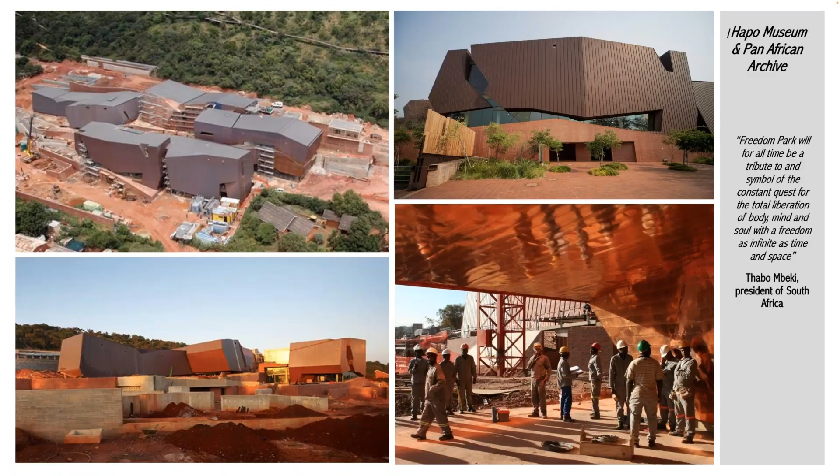During construction, I think also many interventions from governmental side caused delays in the development of the main museum building.

When we presented the design, we had the opportunity to present to the president. When we did our cost estimates, we did not have the full extent of funding, and at that stage the president liked the design and committed to get additional funding. But as things go in government, it took so long to confirm the funding that we had to value engineer, reduce the budget, go out on tender, and appoint a contractor because we could not confirm the additional funding.

Only later on we got confirmation of the funding, but ultimately that delayed the project. So the question is, how do we deal with such delays when they come up?

When I started my research into delay, I really started with the question: what causes delay in construction projects? And the other thing I wondered was, is there any synergy between countries? So I studied delays in 16 or 17 different countries, and there's a list of those countries.

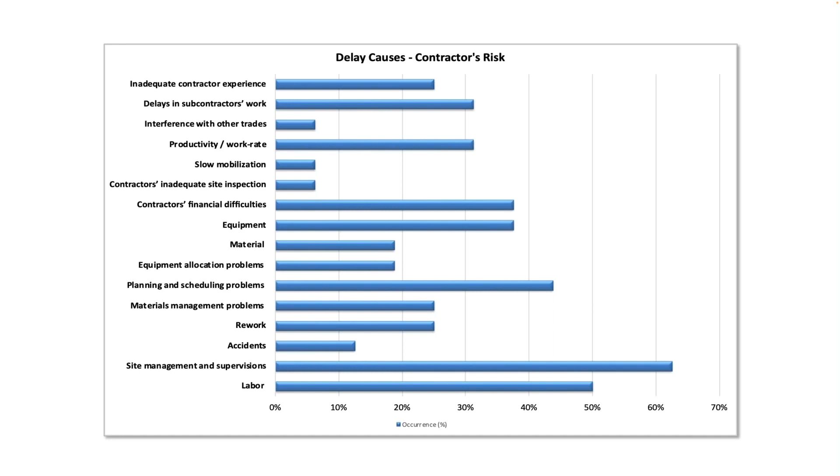Comparing countries: in the United States, change orders during construction were a major cause. A study in South Africa looked at 20 years of public works projects, and the main cause of delay was insufficient construction or contractor production rates. But you'll see it's a wide variety of different causes that ultimately delay construction.

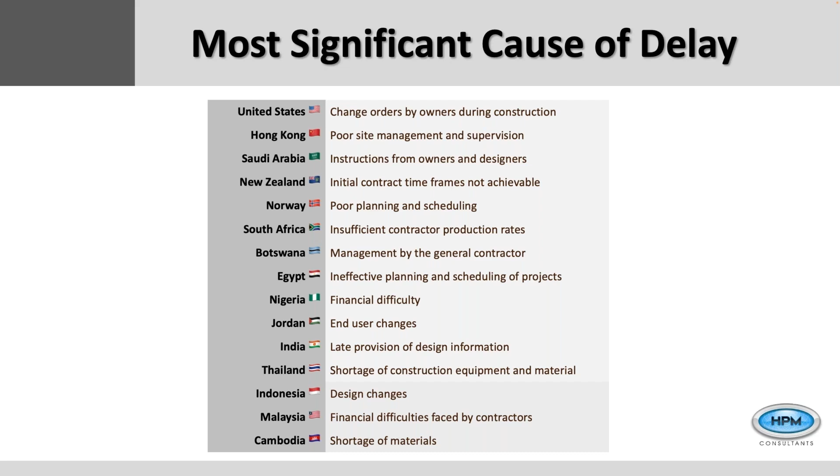Now let's talk a little bit about delays — how do we deal with it? I want to quickly explain some of the key concepts that are critical in delay and delay analysis.

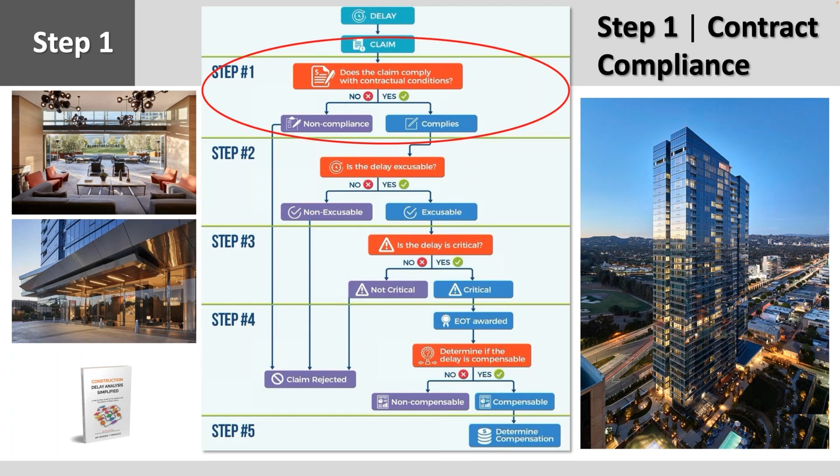So look at, for example, the notification, and did the contractor comply. If the contractor complied with those provisions, we move on to the next step. So whether the delay is excusable. So what do we mean by excusable?

So is it a valid delay? Normally excusable delays are defined as delays that are caused by the client or anything that's outside of the control of either the contractor or the client. So the contract would give you guidance.

So secondly, one would typically evaluate delays, and I think that's the principle. I think this is a school building close to San Francisco, and the delays that the contractor experienced there, I then basically compared to the contract to determine whether they're excusable. If it's excusable, and the client or owner's risk, then we would move on to the next step.

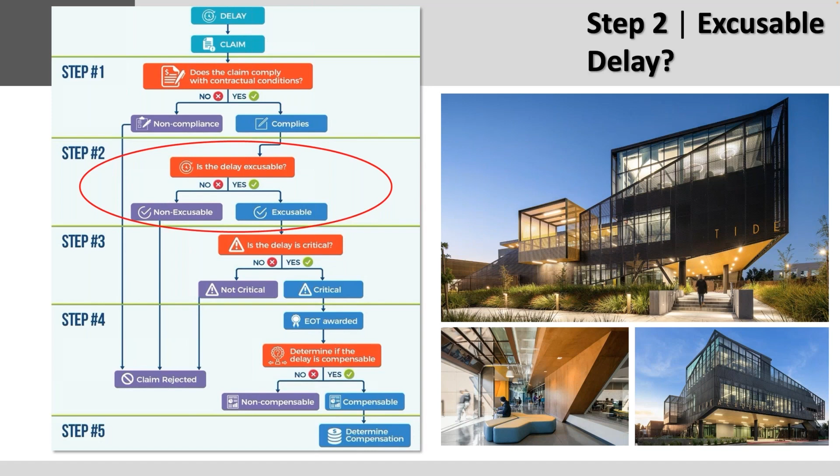Now, the next step is whether the delay is critical. So remember our breakfast analogy. We would ask the question whether this delay is on the critical path or not. If it's on the critical path, indeed, the contractor would comply and qualify for extension of time.

The project that I'm showing there is a student accommodation in Orange County, California. I think that project had various delays over a 2-year period that ended up in arbitration, and the key question that we asked in terms of the analysis is whether the delay is on the critical path when doing the analysis.

Now, ultimately, if you tick the boxes in step 1, 2, 3, and the delay is critical, it's excusable, the contractor complied, we will look at compensability.

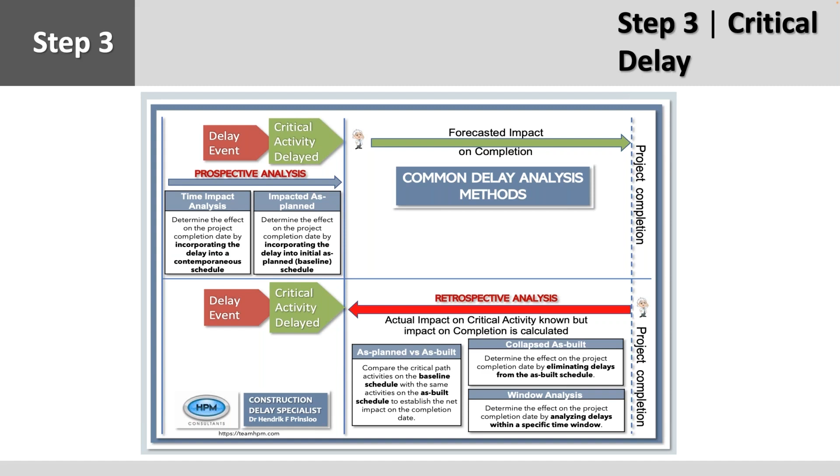Unfortunately we don't have time to go through this in detail, but this is the typical delay analysis methods that you get in industry, critical path methods, which are utilized to determine whether a delay is on the critical path or not. If you're interested in more information, you can go on my website or join me on LinkedIn.

I publish articles from time to time. Once we've determined it's critical, we go to the final step to determine whether it's compensable, whether there's time-related cost payable to the contractor. The JBCC is especially good in guiding on that issue, the provisions in the contract are structured in such a way that it guides you and tells you whether a specific cause of delay would qualify for compensation. Finally, we determine compensation, and that is ultimately the 5 easy steps included in this analysis method.

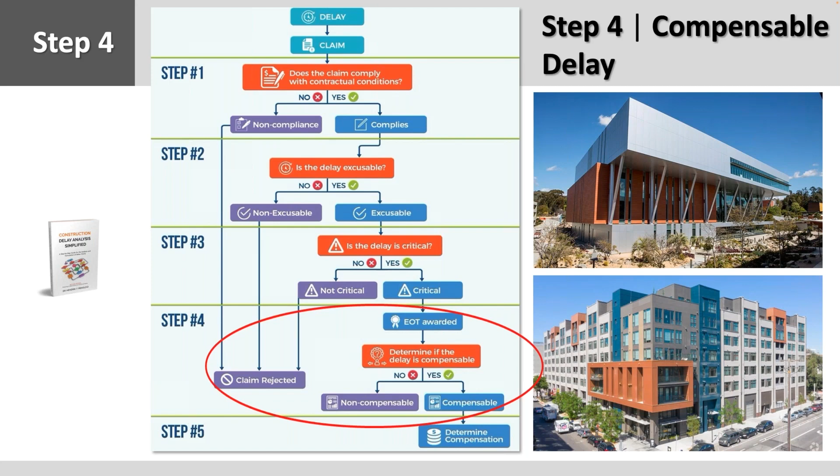This has helped me in dealing with projects along the way, dealing with delays. But ultimately, delays that create problems are delays that aren't dealt with when they happen. We see many times that if you don't deal with a delay when it happens, it might ultimately end up in a dispute. So maybe my last word of advice is, if you identify a delay, try to resolve it on the spot rather than waiting for a long time.

Okay, let me pause here, so I haven't exceeded the 20 minutes by too long. I'm going to pause, and if there are any questions, you're more than welcome to ask.

Yes. You can join the panel. Here we go. Okay, there we are, Hendrik. Thank you very much for that.

It's my privilege to introduce you to Philippe, one of the principals of SAOTA. Philippe completed a Bachelor of Architecture with distinction at the University of Pretoria in 2001. He joined SAOTA in 2008 and has been principal since 2014. Philippe has a strong interest in vernacular design and sustainability and regularly serves as an external examiner for master's design theses. He has a responsive design approach, exploring unique solutions that meet the client's requirements and fit into the context. He has successfully delivered on a wide range of projects, from villas in Europe to mixed use, urban design and corporate projects in West Africa, China, India, and Turkey.

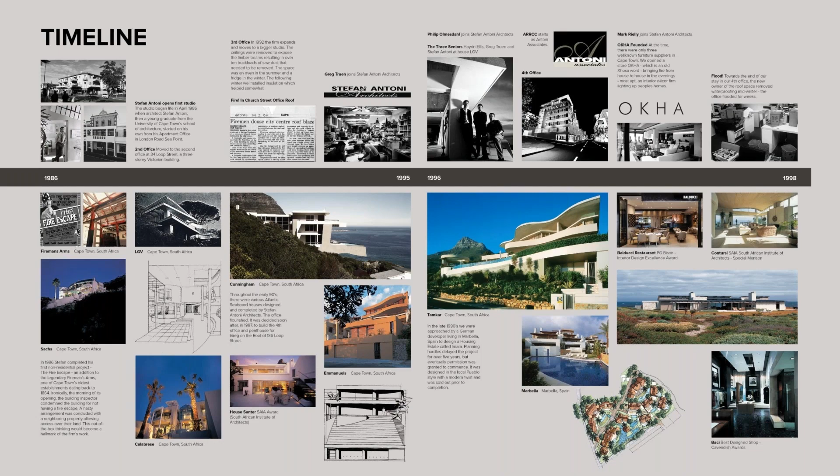Stefan Antoni started the company in 1986. It's his birthday tomorrow, so quite some time ago. It was only in the late 1990s that we did our first international project, in Marbella. Going through this timeline, you get a sense of how the work evolved over time. Of course, our sister companies ARRCC and OKHA joined at some point. As time went by, we celebrated our 30th birthday, and the work became increasingly international.

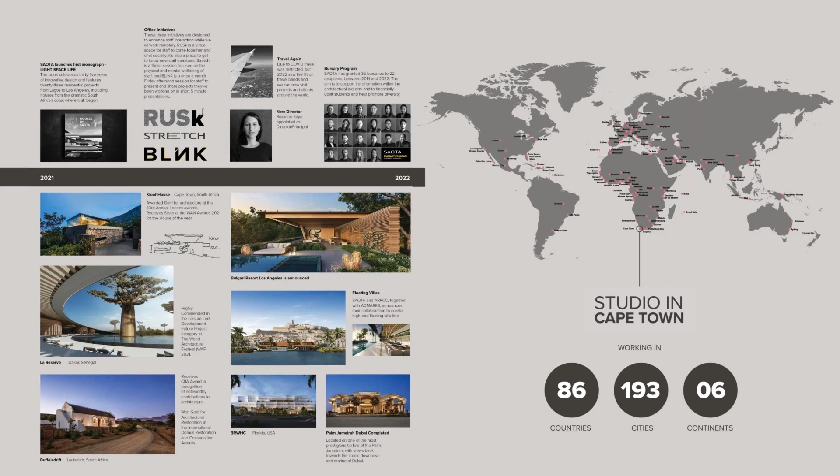At the moment, we are represented in 86 countries worldwide. That's about 193 cities over 6 continents. What I always find very difficult with talks like this is choosing which projects to talk about.

So recently, when doing a talk, I started organizing our work around themes or threads of thinking. It helped me organize our work and look at it, because a lot of the time we're so busy doing what we're doing, in the moment, that we never stop and analyze what we're up to.

There are 3 threads that I pick up here: the idea of an abstract reference for building form and skin; a second thread about bringing nature into our work; and a third idea, which is really about where worlds meet, which is quite unusual. I'll talk about these things very quickly, because I've got many slides to go through.

The first project is one we did in Lagos, Nigeria, on a very prominent road — Bourdillon Road in Ikoyi. Greg's team worked on this very closely, and you can see how that cell idea found its way into the shape of the building.

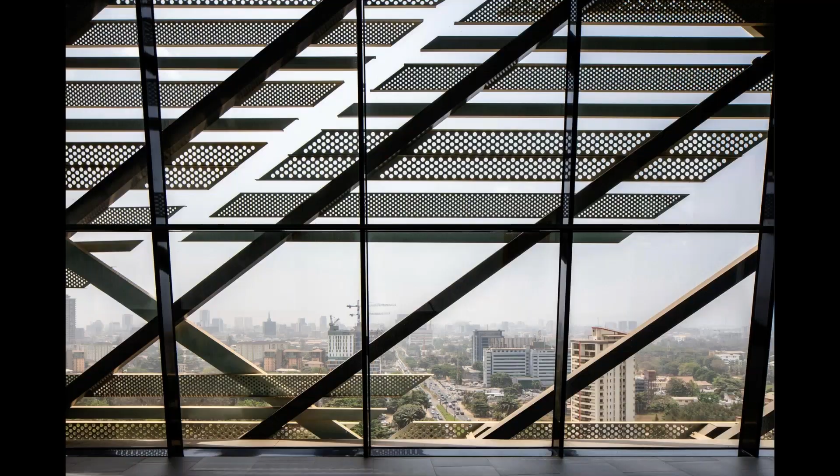When looking at how to protect the building from the climate, we introduced the idea of almost a filigree or screen that protects the building. The effect is quite effective at cooling down the building, but it still provides views through — it's almost like putting on sunglasses. Quite importantly, the building opens up towards the entrance side, to the public.

The next project is a similar theme, but a very different looking building — sorry, I see the slides are going very slowly. This building's skin was really inspired by pattern making and weaving techniques that we find in Dakar, Senegal. It's another office building, and you can see again in the sketch how the building opens up.

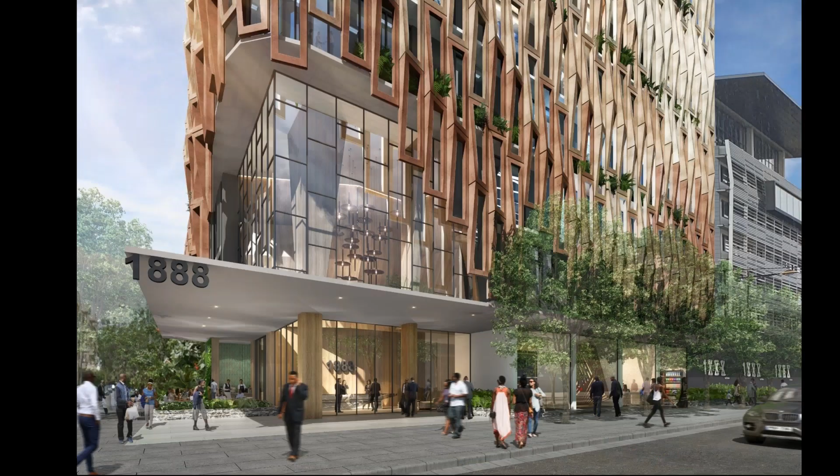Here we explored the use of precast concrete, tinted concrete more specifically, and this was the resultant proposal. Again, similar ideas — the building opens up at the bottom corner to the public, announcing the entrance, and uses precast in different shades to animate the building and protect it from the heat. It's a very dusty environment — they've got the Harmattan, which blows over the Sahara and brings a lot of dust into the city — and these colors really respond well to that, giving the building a better chance of looking cleaner over time.

The next project is a smaller one in Casablanca. Here, the theme is how we brought nature into the experience for the inhabitants of the building. I'm going to switch to a quick video, if I can.

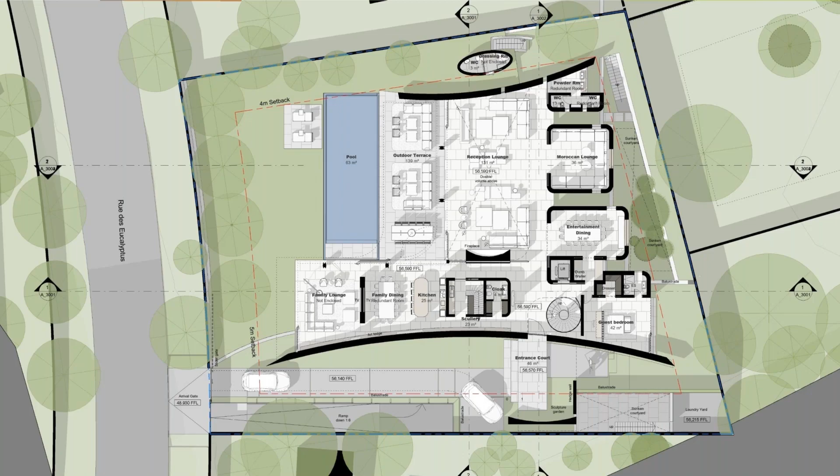Here you can see the resultant plan, indicating how we really opened up this fairly compact site. In Casablanca, and actually all over Morocco, there are these wonderful gardens, and we loved the idea of opening up that experience to the garden. And of course, we looked a lot at the modernist work done in Morocco, especially in the 50s and 60s, which certainly inspired our work as well.

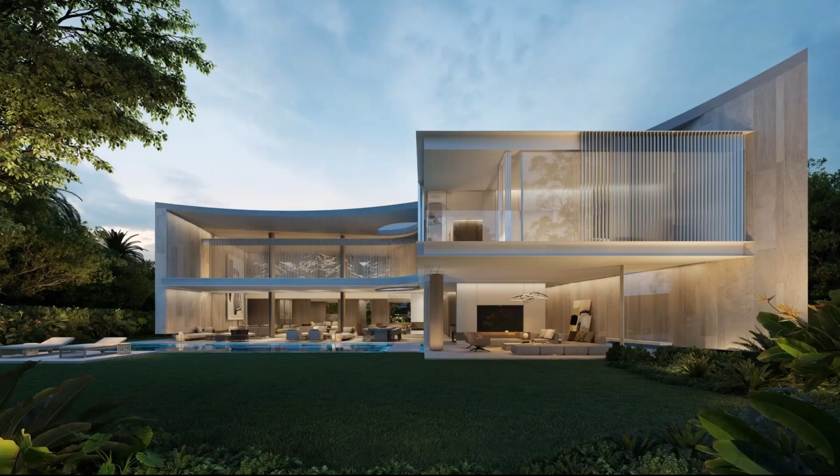Looking from the garden back towards the building, you can see how all the living spaces open up to that lovely garden.

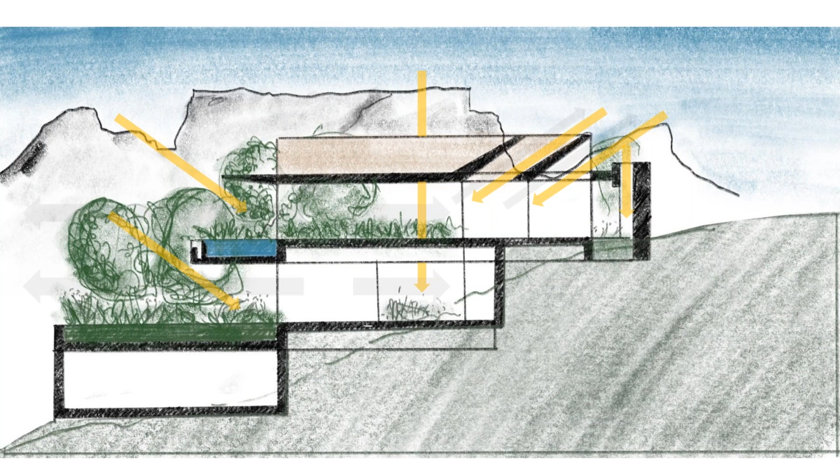The next project has a similar theme. Here we're back in Cape Town. It's a residential project, and the building is really on the foothill of Table Mountain. The challenge was really to bring light and views into the experience. One must realize that, with these things being so three-dimensional, you really have to open up the roof to enjoy those views. And then the building protects the inhabitants from the noise which comes from Kloof Nek Road.

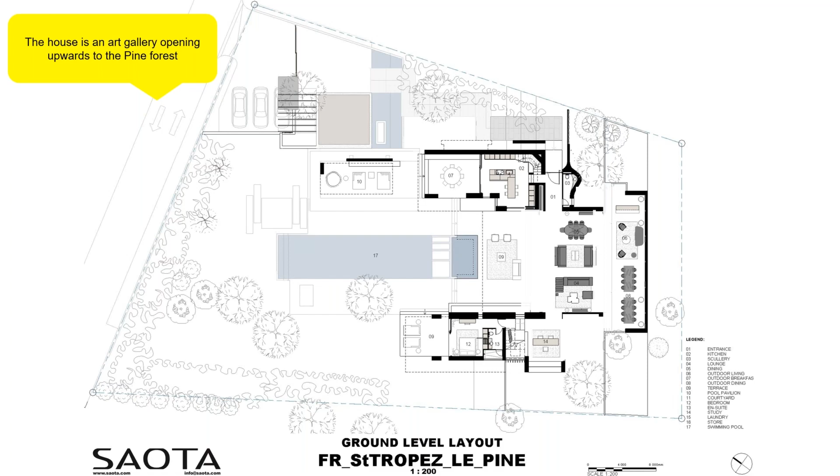The next project takes us to Saint-Tropez, quite a small project with a very similar theme. It's a project where there was absolutely no view, but the building was surrounded by a fantastic pine forest. The client liked this idea that it's almost like a gallery. What we did is we folded the roof, and that allowed the light to wash into the space, almost like a gallery, but also gave all kinds of views up into this pine forest, which gives it this kind of charm. Of course, the folding of the roof also allowed for the structure to work; otherwise, one would have needed columns in there.

The next project is in Geneva on the Lake Léman. This was my first project in Europe. Quite a challenging site — as you know, the sun comes from the south, and in Geneva the sun is everything, daylight is everything. When I started working on it, we started carving away at this object. I think it's fair to say it's for a very eccentric client who was quite open-minded. In grappling with the design, we looked at the site photographs again and just noticed this very beautiful shape in the Alps across the lake.

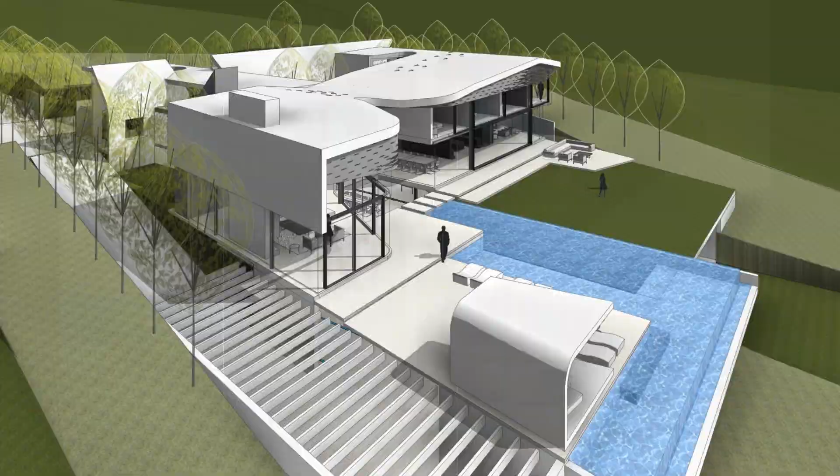That was really the moment of inspiration that led us to the eventual design. If you imagine the light coming in and this view, that's really how we responded to nature and to what's around us. So very often there's a lesson in that for us as architects, just to look around us quite closely. And then, as the building roof dips down, that mimics and mirrors the line of the mountain beyond. You can see the first impression when you walk into the space, the lounge towards the right.

Looking at the building from the front, you can see how that line was picked up in the form of the building. Of course, there were many regulatory aspects that had to be considered that also dictated some of these roof angles. To our delight, this is a very contemporary building in a fairly old neighborhood in Geneva. It was very well received, and the building has a kind of politeness in terms of being softer in that environment — we actually achieved our approvals within 3 months.

The next project has a similar idea thread. In this case, it's a competition we'd won working on the Lake of Lucerne. With this project, we had an incredibly inspiring client who basically said they don't want a house, they want a park — they want to live in a park.

They have this large piece of land, about 37,000 square meters on the Lake of Lucerne. So we won the competition and started working on the project.

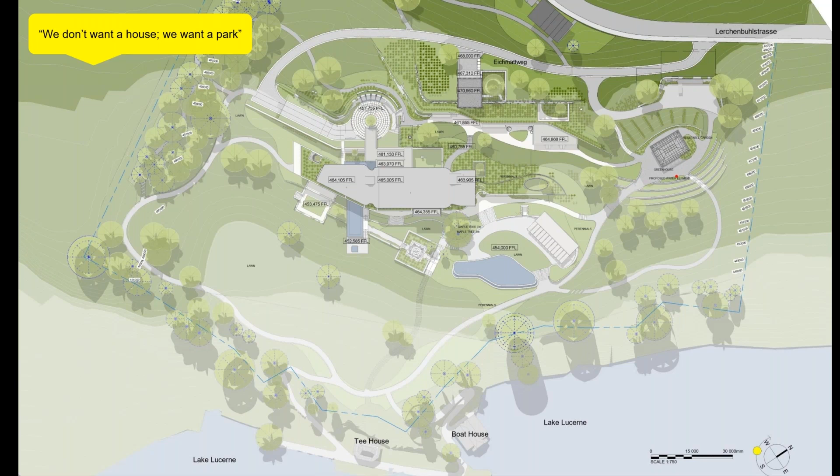So we allowed the landscape really to spill over the building, and eventually this whole building would be grown over with meadows, natural meadows. We're working very closely with Piet Oudolf, the landscape architect, on this project.

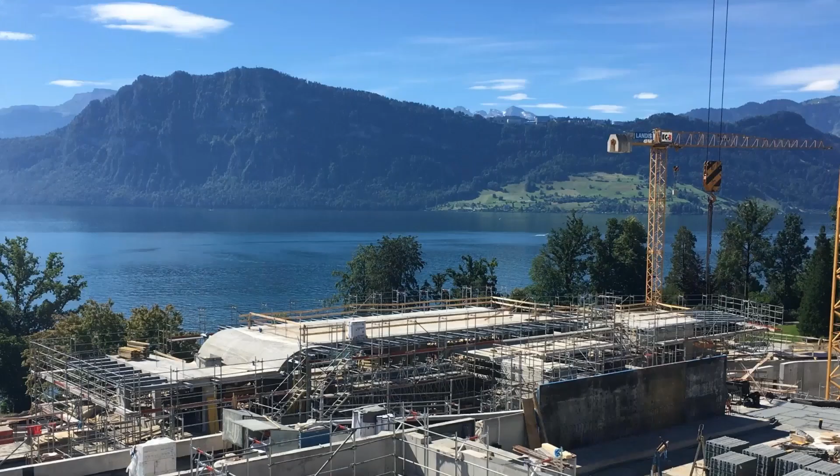The project's been completed, and unfortunately I'm not allowed to show you any photographs, but this was an under-construction photograph taken about 1.5 years ago, where you can see the context of the project.

The next project brings us back to Cape Town. Here it's on the other side of the mountain than Kloof Nek, on the Kloof Road side, on the Clifton side.

What was fascinating to us about this project when we started working on it was really this idea of how can we reinstate the forest floor. Many of the buildings on this road really look like small apartment buildings, and we wanted to move away from that. The idea that we actually reinstate the forest bed here, basically the second floor up, and break the building up with a garden, was a very key idea in bringing nature into that experience.

The base of the building is really grounded and relates to the mountain, and then the building becomes lighter, and in fact those trees have subsequently grown right through those openings.

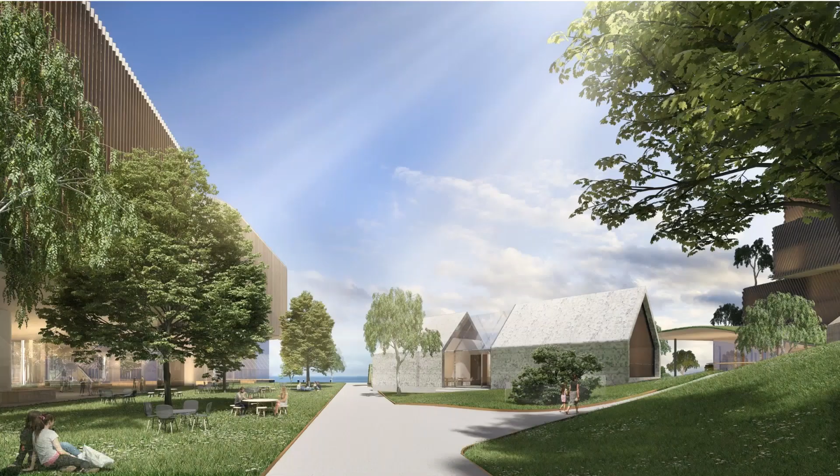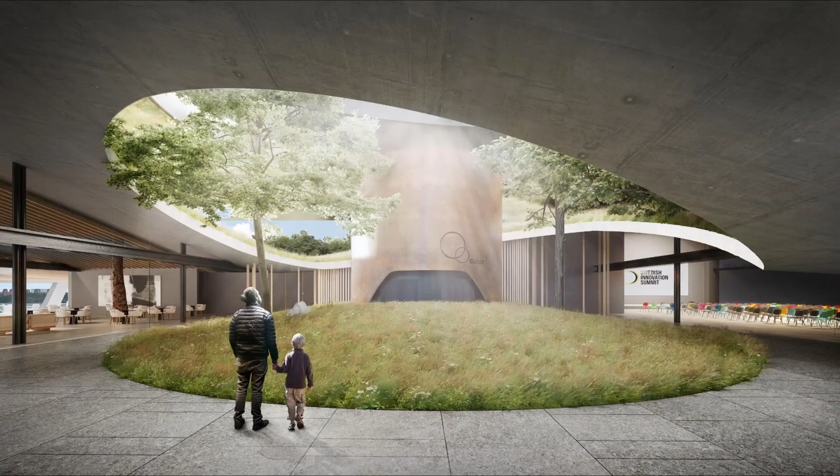But all of that being said, it still has something of that industrial quality that used to be on the site. So this is the atrium of the hotel that actually goes up all 12 stories, and that allows light into the space, and we want to bring trees into that experience as well.

Another place where we've looked at this concept was in Dakar, Senegal, more specifically Sindia. To the left there's a nature reserve, to the right a residential village, and to the bottom, agricultural land. The city's vision for this part of the city is quite futuristic.

They've actually started building some of these buildings. But for us, it was also important to understand the West African vernacular and also look at what was here before and how people inhabited these areas.

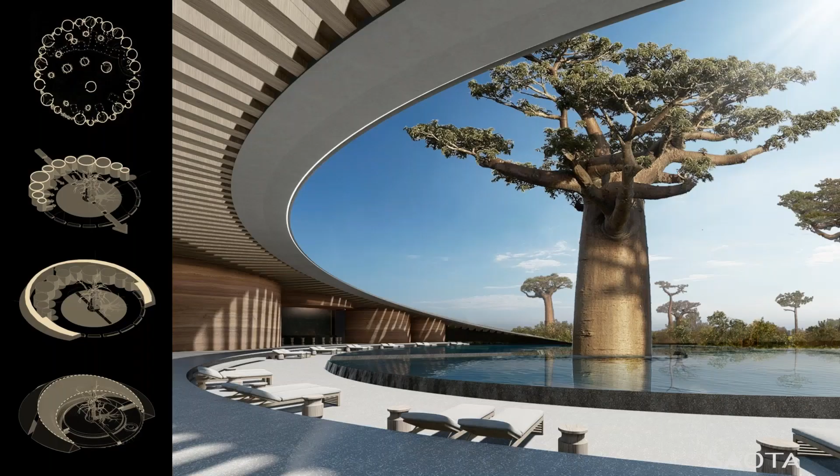When we started developing the project, this is also a hotel resort. You can see in this view how we brought those ideas and worlds together and interpreted them in a contemporary way. The site is covered by these beautiful baobabs, so it's almost like a baobab forest, and we managed to save or retain all the baobabs.

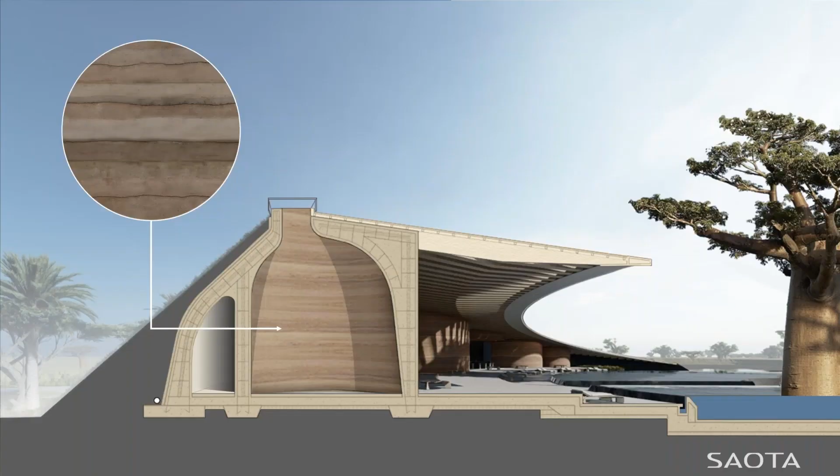This idea of meeting around the baobabs, which is so prevalent and important in African culture, we tried to embrace and make part of the experience. Carving into the landscape, and similar to the previous project, we're also allowing the savanna, or the landscape, to grow over the building.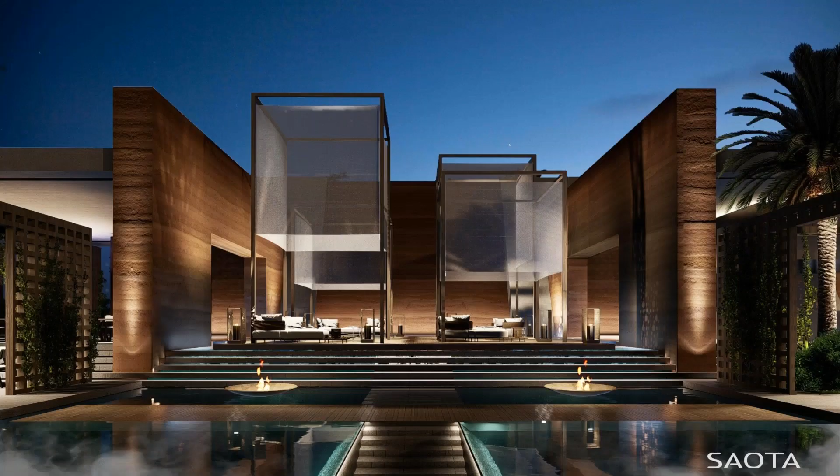Here you can see the main pool. The idea is really that we bring local artisans to work on some of these elements, using rammed earth for the construction of the building.

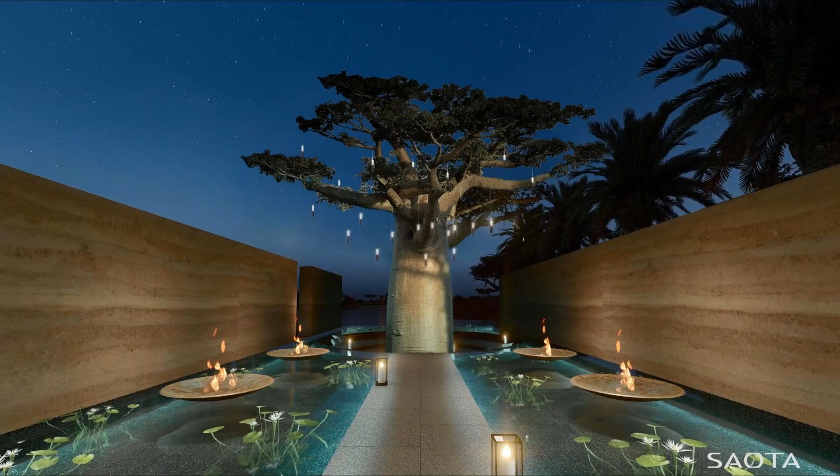These are some of the courtyards outside of the food and beverage areas, and then the hotel suites, the spa. Similarly to our project in Switzerland, we're testing this idea of the fluidity of concrete, which came into this project as well on this main axis. The treatment rooms are to the right there.

And I forgot to mention, we've got an abundance of water on the site, so we were quite lucky. Underground water was not an issue, although it's quite a dry environment.

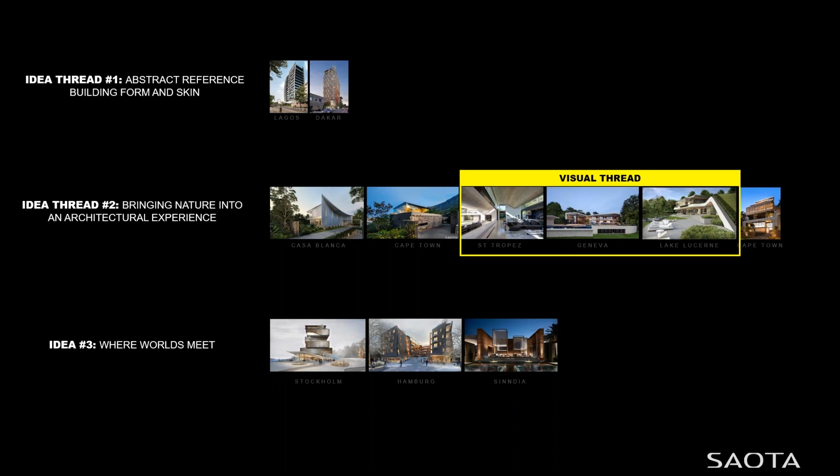So when I started looking at these projects and preparing for this presentation, it struck me that there are visual threads that tie these projects together. So there's an idea thread and a visual thread, and it became quite interesting to me to actually explore that. Looking at our projects, this becomes a challenge - how do you choose the projects that you present? So I've identified 5 projects that I want to focus on now for this talk, which in my mind has a visual thread that binds a project.

So this was the first project, a small project. It's called Jafnvægi Tower. It's in Iceland. It was a competition project that we did virtually, I think within a week that we participated in.

And what's astonishing about the site is this is where 2 continents come together - well, continental, shall we say, tectonic plates. So when one is on this fissure in the landscape, one is literally between a tectonic plate of North America and a tectonic plate of Eurasia. And that for us was a huge inspiration in designing this building and making that experience really the key experience.

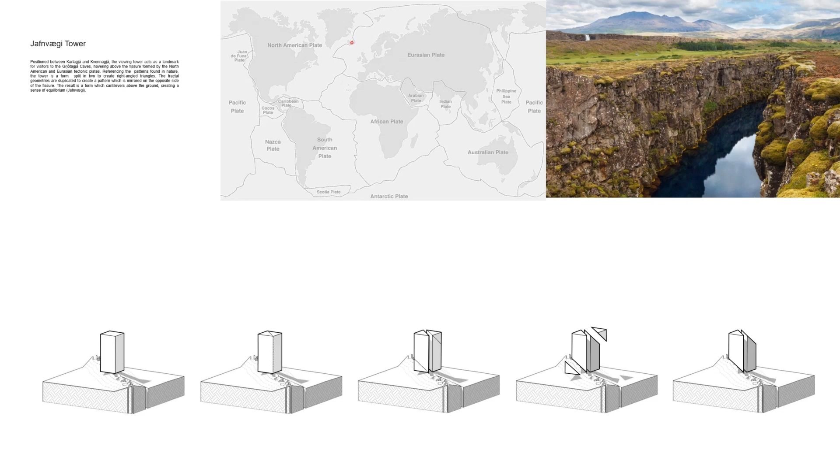So we sliced this object into 2, and then really like in fractal geometries shaped those openings. If you look at the section, it becomes quite clear.

It's a fairly small building with very basic functions. But what was important to us in the design was really to slice this building up completely and then take the visitor over this threshold between the two continental plates all the time.

And the construction was proposed to be quite simple Icelandic timber construction, and then quite a simple but iconic shape in the landscape.

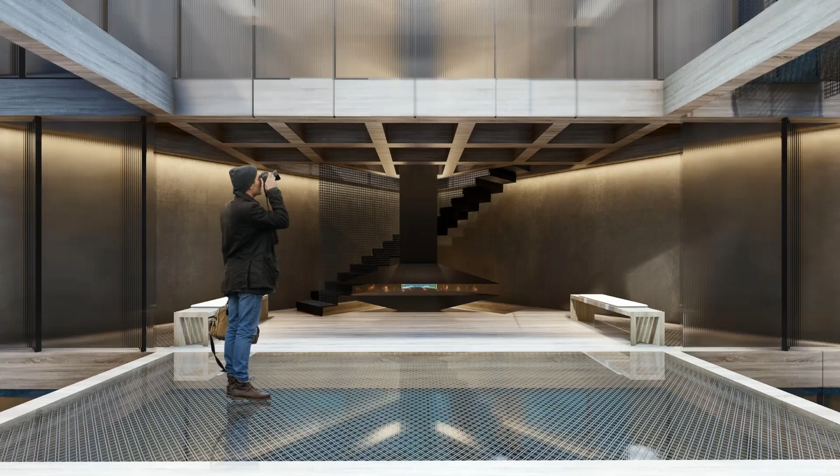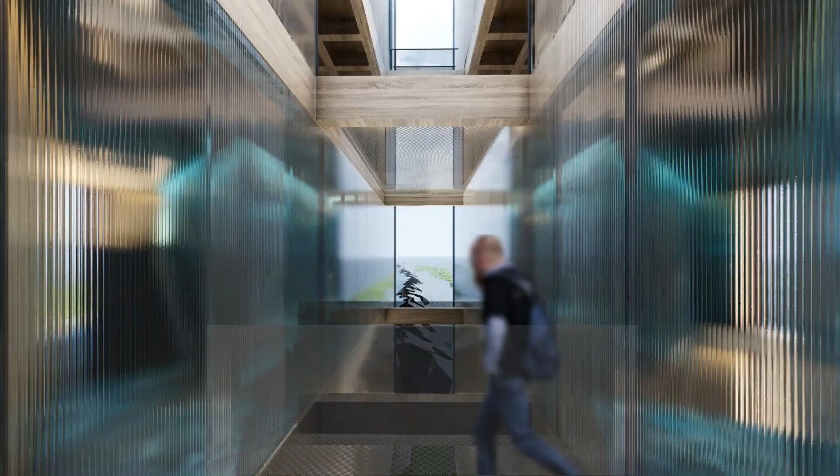You can see the floors also open up, and when you are in any of these passages or spaces, you kind of connect to that - shall we call it the rift - where these two plates meet. That has a kind of a tension to it. So that's a fun little project to start off with.

The next project is a project in Miami. It's called N-Bay, and it was done by Mark Bullivant and his team with Kieran Robertson.

So Miami, quite a unique site. In this case, you can see the double site there combined. And what's important and unusual about this site is that it has access from the water and from the road. Here you can see some more images of that context.

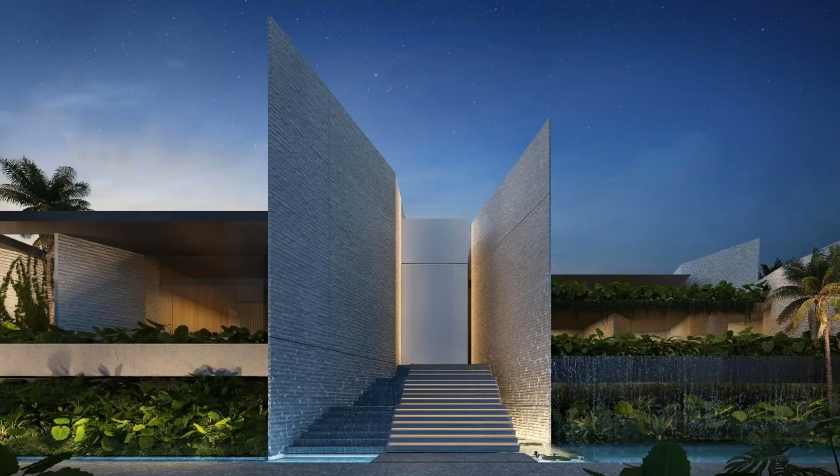Talking about a visual thread, you can see how the building responds to the road entrance, opening up again this idea of fractal, almost like shards, that announces the main entrance to the building. And then from the water side, a similar language, and you can see that language coming through in the roof planes as well.

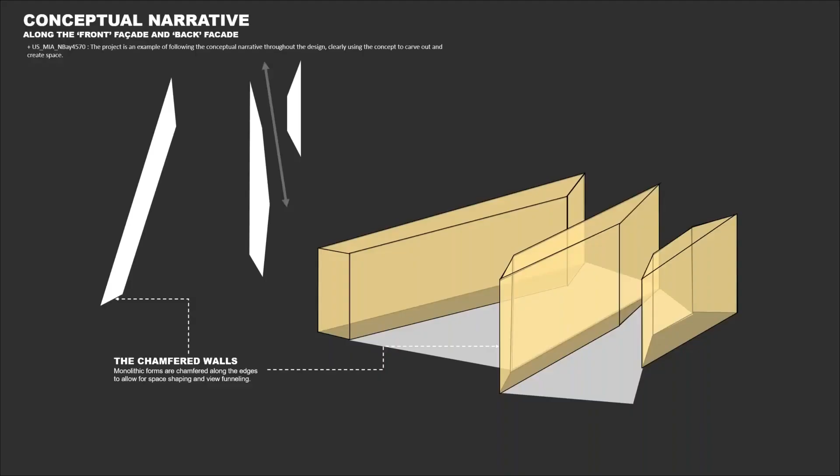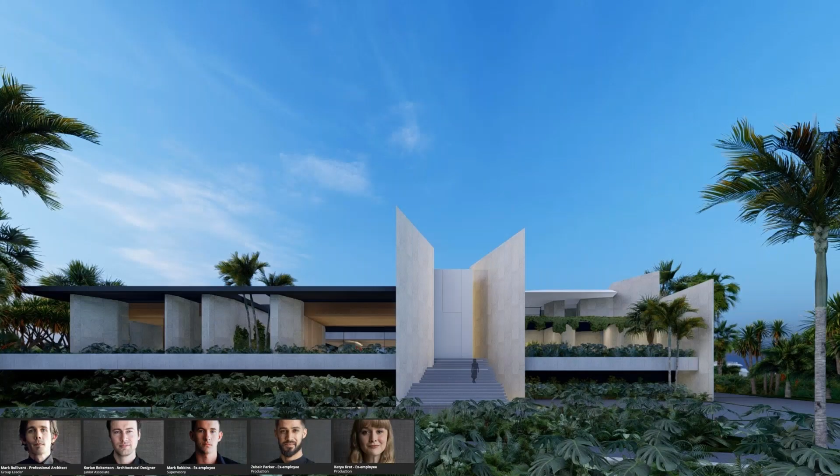So just a few diagrams that explain how the building is organized, and you can see these shards that really give form to the space. But what was important to me is that those shards also occur three-dimensionally in the roof shape and the pool shape. That was an important aspect that also inspired some of our work that followed this, and some more 3D images of that project.

So the next project, we mentioned it very briefly earlier, was the Neuländer Quarree. This was a project that we were invited to partake in a competition, which we won.

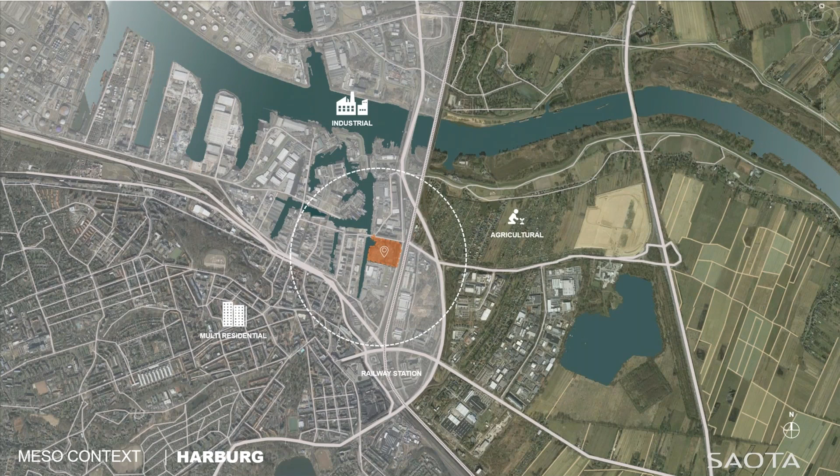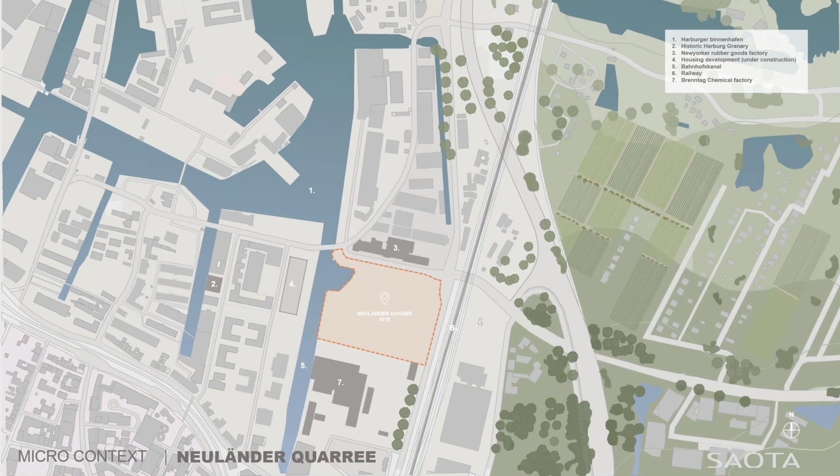And again, this idea where worlds meet. So to the top left, you've got an industrial area, some agricultural land to the right, and multi-residential areas to the left. And this whole project was sparked by a new railway station that connects you to the city within 20 minutes. So the site's an old industrial site, and next to us is a glue factory, and to the top of our site there's a rubber factory.

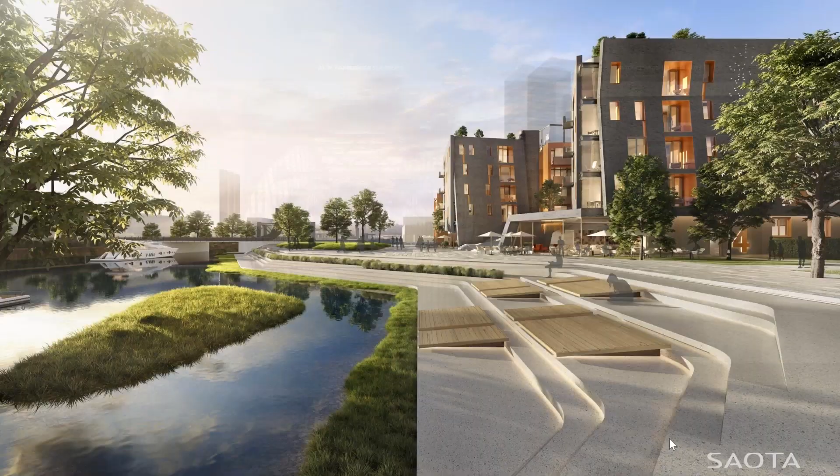And the way we interpreted that in our project was really firstly to re-establish this wonderful canal and activate it.

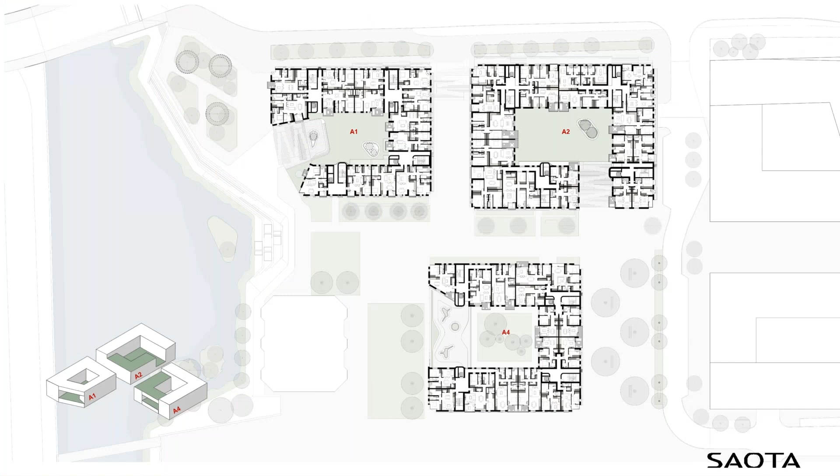Much like they do in cities like Copenhagen, we designed a building that really responds to those finishes. It's got a very strong concrete base, and the brickwork is prevalent in the building. We were given a very strict, almost shoebox shape to work within from the urban designers that we couldn't really move outside. But we did convince them that we could actually challenge some of these ideas and bring the public up to the building.

We also managed to convince them to change the skin of the building slightly, and they gave us some leeway in shaping and sculpting the skin, almost like a folding piece of paper or origami on the building. That's unusually done in brickwork, in this case a very dark brickwork.

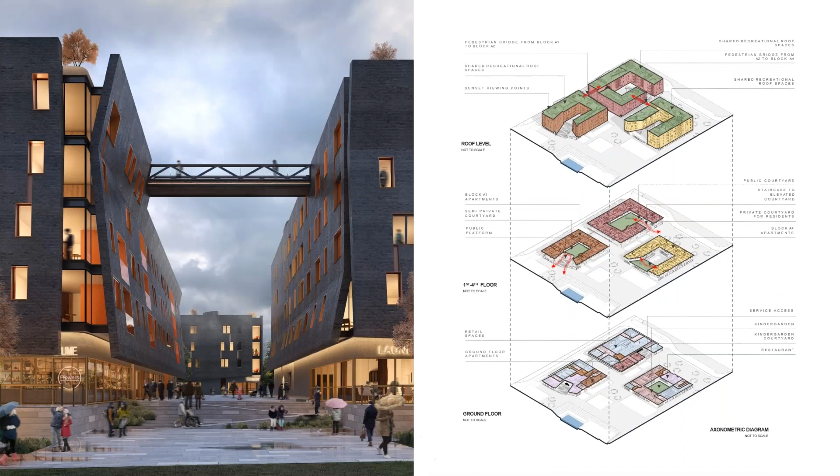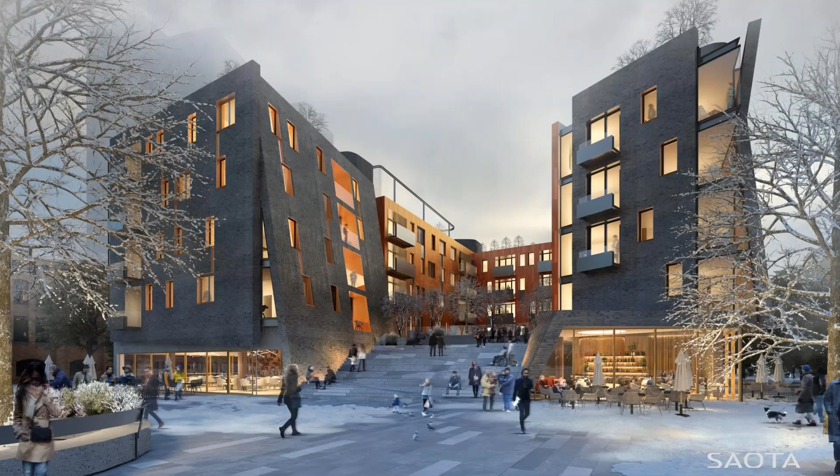And the insides of the reveals we treated with ceramic, which is very prevalent in Hamburg. It's quite interesting that they use colored ceramics for ornamentation, and you get a sense of what the building would feel like in winter. Of course, the base of it opens up for cafes and restaurants.

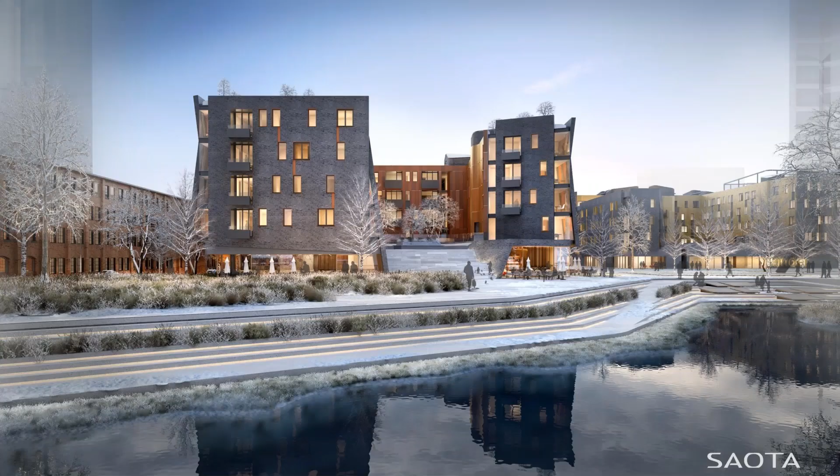In our case, we also allow the public to actually move up into the courtyards. The whole inside of the courtyard was lined with colored ceramic, and each building has a different color that helps with orientating oneself.

The other thing that we managed to convince the client to do is to connect the buildings on the roof level, which is a fantastic opportunity that allows the building to share some communal facilities on the roof, and it helps the building function much more cleverly in terms of social aspects.

So I forgot to mention, this is kind of a medium to low income housing project in Hamburg, and there are hundreds of these kind of mass housing projects happening in Hamburg at the moment because of the huge demand.

So there you can see how the courtyards were colored on the inside and landscaped, and on the section you can see how these planes created protected areas, since the weather in Hamburg isn't fantastic.

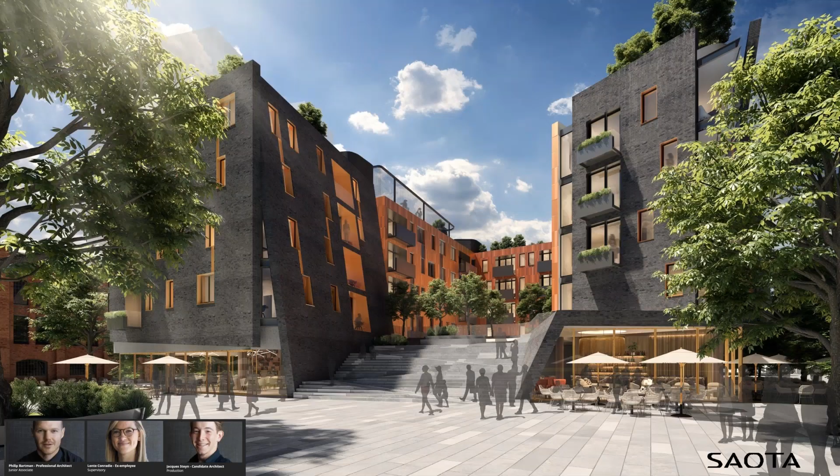The way we animated the roof was really to use the roof space with running tracks, some urban agriculture, and some leisure spaces that people can enjoy and share. So you can see the project in summer, the 2 or 3 sunny days that you do have in Hamburg.

The next project takes us to Tokyo, Japan. We were appointed here to look at a site for a client.

And when one visits Japan, I was struck by how fantastically beautiful the landscape is, but also this very, very strong horizontal lines in the architecture that in a way contrasts with the verticality of the forest and the shapes behind it.

We are positioned, our site's positioned in the city, quite a dense area. When we started contemplating the project, we looked at historic images, and the prevalent thing is this very strong roof shape that provides shelter, heat in summer, and is very cold and snowy in winter.

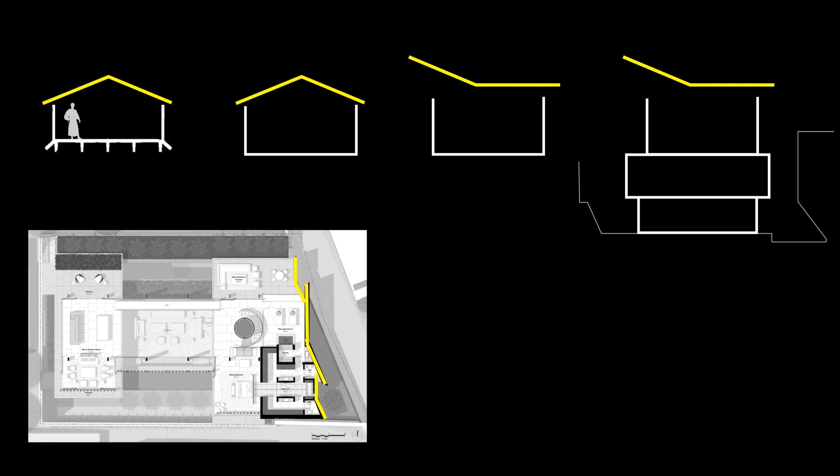We tried to almost take that typical traditional roof shape and reinterpret it in a new way, turning the roof upside down. And similar to the Miami project, we introduced that idea on plan as well as on section.

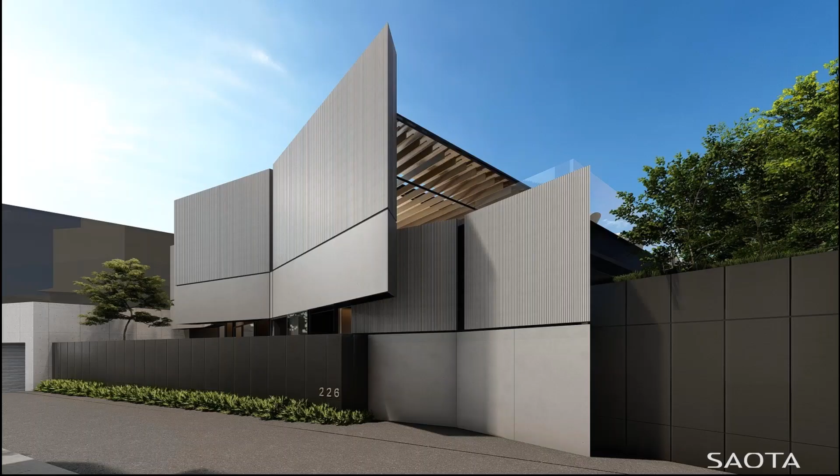So approaching the building, we use these blades to protect the building from noise and to provide some privacy from this very busy road, but then allow for an entrance to happen towards the side of it.

And from there, one moves down into the building, and what is really quite a heavy, almost Tadao Ando inspired architecture becomes lighter towards the top, and the entertainment spaces where one can appreciate the view and the light.

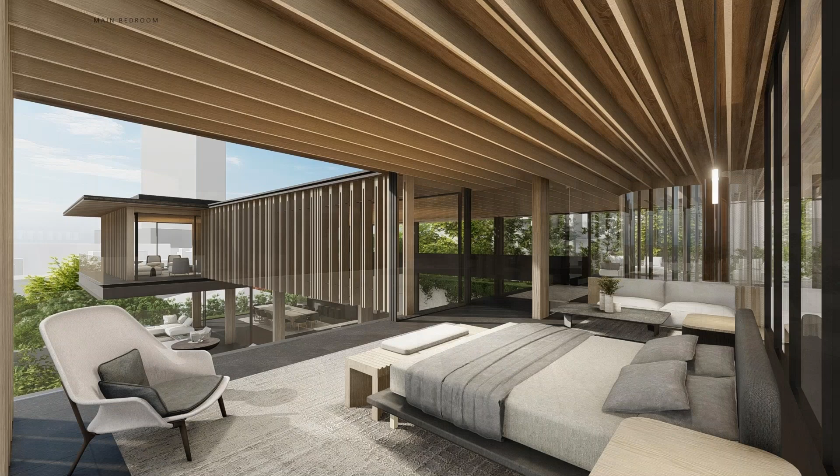It was obviously quite important to bring light right down into the lower levels of the building. So you can see even near the gym at the very bottom enjoys some of that sunlight coming down into the project. You can see how the building fits within that very tight urban environment.

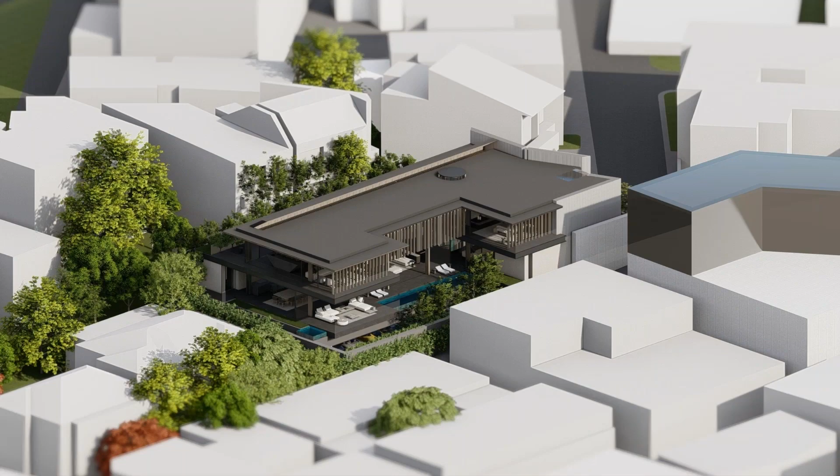And then finally, a project that we've just presented at the World Architecture Festival. It's called The One. It's an apartment building in Dakar, Senegal.

We've been working in Dakar for some time now. It's a fantastically vibrant city that we quite enjoy working in, and our site is situated next to a very prominent road, which is also kind of like a promenade where people run and exercise.

When you walk the streets of Dakar, you feel this vibrancy of the city. Here you can see how people are exercising on those beaches, and many people come to this part of town to enjoy those facilities.

If you spend enough time in Dakar, you'll see people engaging with all kinds of traditional handcrafting, very often as a primary source of income. Whether it's timber, rock, or making sun-dried adobe bricks, those are things you literally see on the road.

Thinking slightly more philosophically, you can imagine how the Atlantic Ocean has eroded and carved away at this landscape. This is a basalt rock formation not too far down the coast from our site.

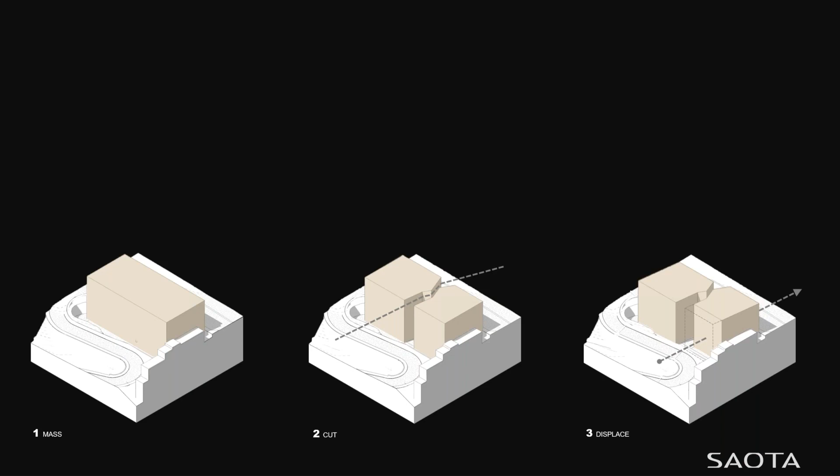When we started looking at the project, we kicked off with a singular mass representing a typical building envelope. Then, inspired by this idea of crafting, we started shaping it to respond to multiple forces—allowing more light in, expressing the entrance very specifically.

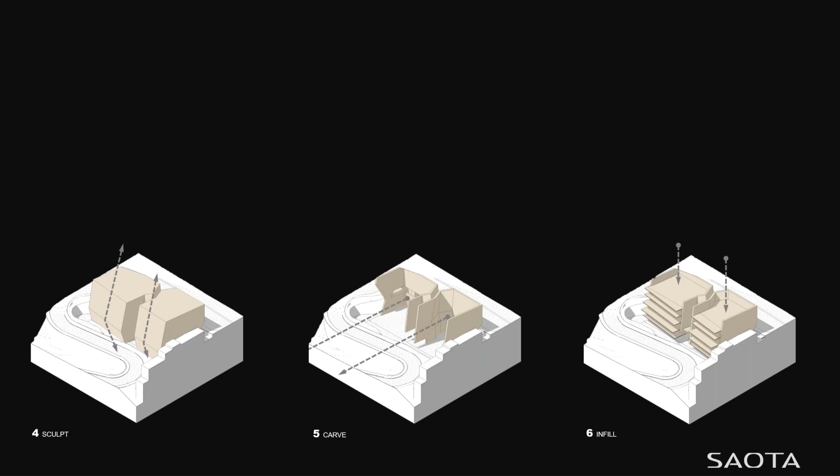Here you can see how the spaces are hollowed out and made much more open to the ocean views, but at the same time much more solid towards the roadside. So I'm going to switch to the video.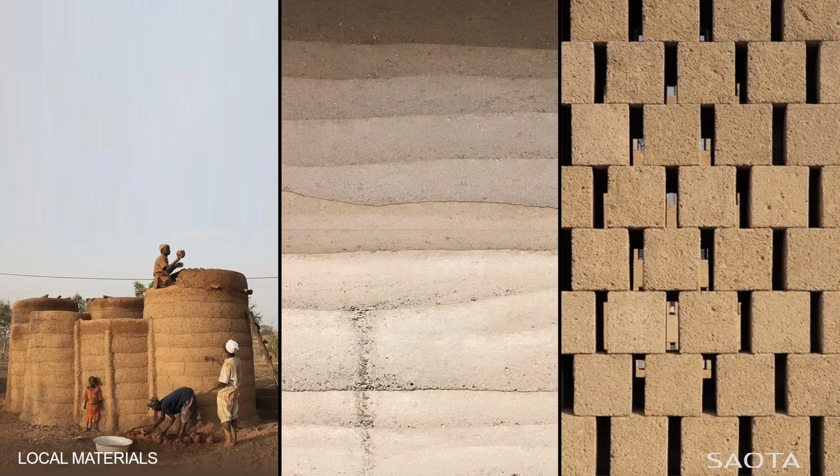The next thing we investigated was the use of materials. We wanted to source materials close by, using the land or ground from the site excavation, and using that to actually construct the walls.

We could use about 64% of the material on site to construct the building in rammed earth, and some of it as adobe bricks.

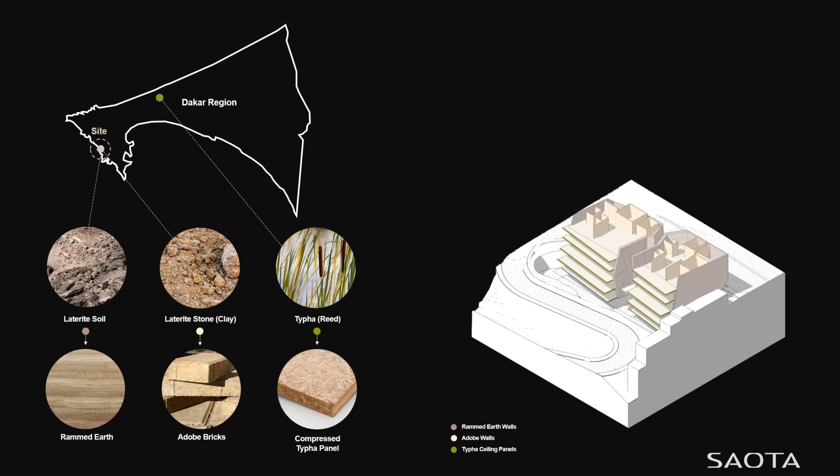So we're using a very even steel sheet on the inside, and then a much rougher finish on the outside to achieve this. I'm going to jump again to a short video.

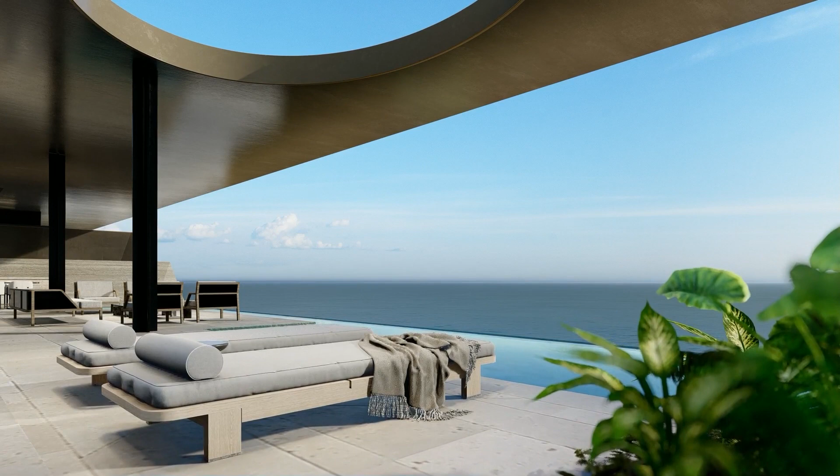You can see that effect of the different textures of the rammed earth, really expressing the entrance of the building. This is moving up to the upper level where there's a shared facility, a health facility, and you can see how the building opens up to the views.

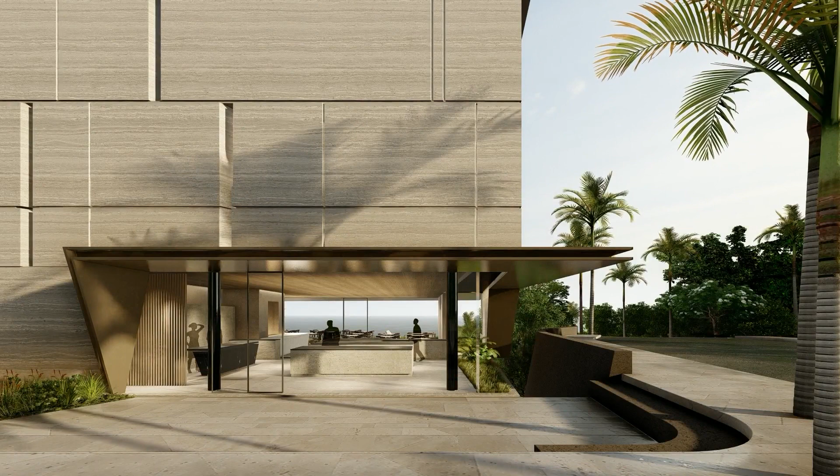The corner we spoke about earlier, where the cafe really opens up to the building and to the road, and the experience of moving through that entrance space, kind of backwards to the main entrance.

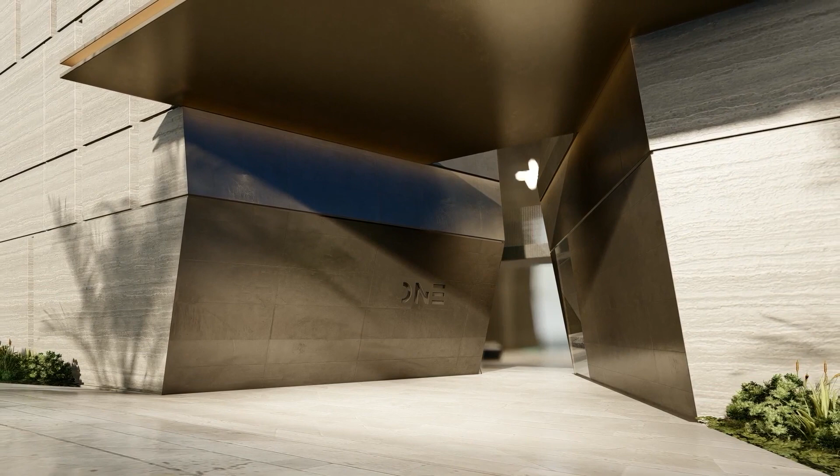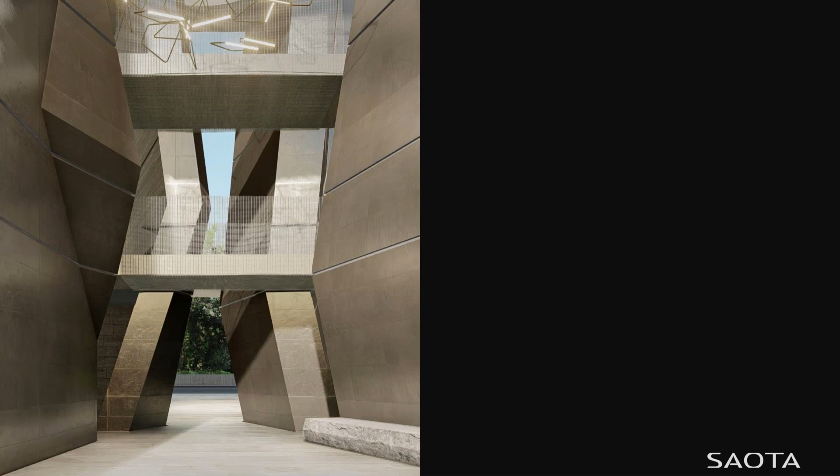Sorry, I'm realizing this video is actually out of sequence, but it's okay—one gets the idea, with an entrance canopy that protects people when they arrive at the building. Just some images that talk about this entrance idea and how it's carved in an undulating shape.

Again, a visual thread that we pulled through from the Hamburg project. And then finally, how the building sits within its context. This development in front of it is actually a development that we also did for the same client some time ago.

And then just indicating how the building is responding to the slope on the site. We wanted to push the building down quite a bit just to keep it visually unobtrusive, but still allowing the views where we could.

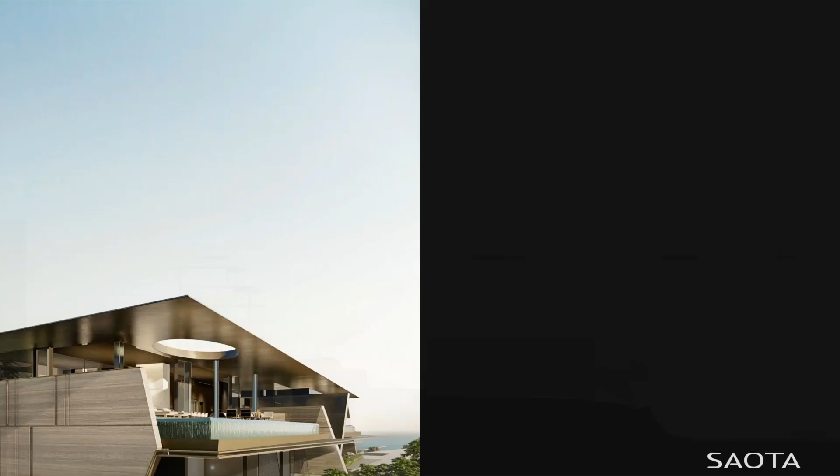And then the top level, that's a shared level, and the corner I mentioned earlier opens up to the city, giving lovely views back towards the city without allowing too much of the noise from the road coming in.

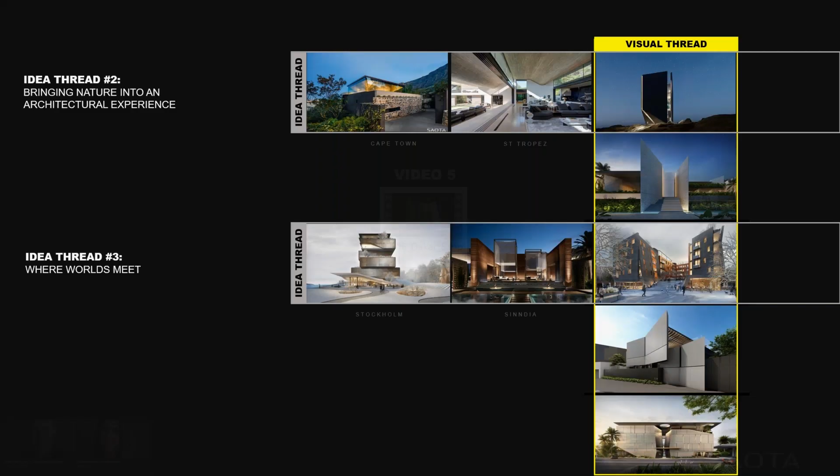I'm going to skip these videos just because time is quite limited. So in conclusion, I think it's fascinating for me, as one of the senior architects here, to look at our work and try to identify these threads, whether it's an idea thread or a visual thread.

A lot of the success in some of our projects comes from finding a very strong visual identity, but also a big idea. There are many projects that have a great idea but end up feeling like a diagram that's just been extruded. Others have a very strong visual identity but no big idea. Moving into the future, we are exploring balancing these ideas, always looking at the context around us to inspire our work, within the DNA of our company and our visual identity.

A huge thank you to everyone, the team that's worked very hard, my fellow principals whose work I've shown so much of, though I didn't credit everyone. Thank you from all of us, and thank you again for inviting us. If there are any questions, feel free to ask.

Right, Philippe. I am really speechless, and I'm sure Emil has the same sensation or emotion. All I can say is thank you very, very much, Philippe. We unfortunately are not going to be able to take any questions, but colleagues, those of you who enjoyed Philippe's presentation, please post them on the chat box or questions box so we can pass them on as a compliment to Philippe. You're quite right, Philippe. Our journey started many years ago back in Polokwane, and just to see the extent to which you were prepared to go to make this presentation possible, it's seriously impressive. So, Emil, from your side.